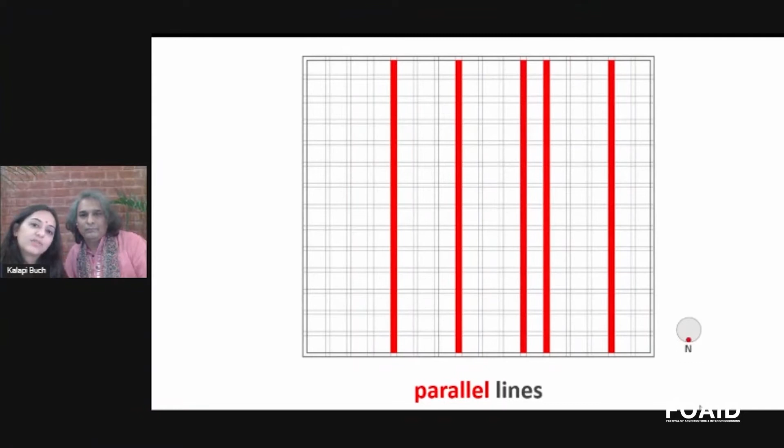We started establishing the relationship of built versus open, and first established the 5 structural lines of the residence, then started opening it up, and finally found this kind of arrangement, where the space flows from outside to inside and inside to outside.

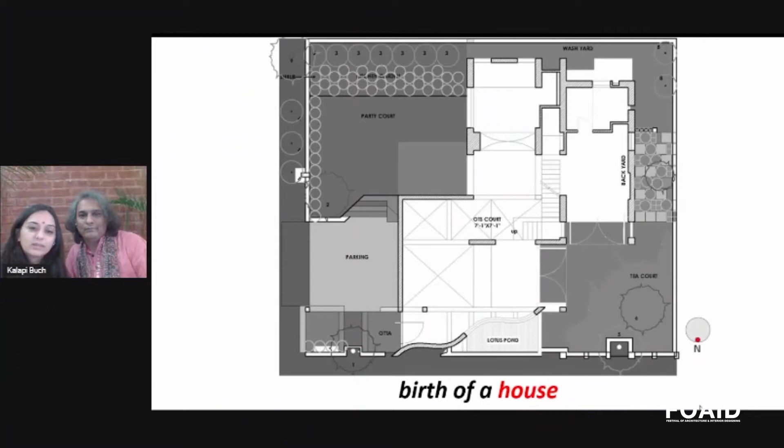Here we have 3 courts: the party court, the central court, and the tea court. They are three different courts. One is inside the house, within the house, and the other two connect to other roads and the surroundings.

Here we didn't have much scope to connect with surroundings, so we have used a lot of skylights, and the other huge openings are opening towards the courtyards.

So friends, it's my turn. Use of local material and craftsmanship is another way we look at our projects, and I just want to show you one approach where we have used paper tubes which are locally available, and have really gone on to use it into the project.

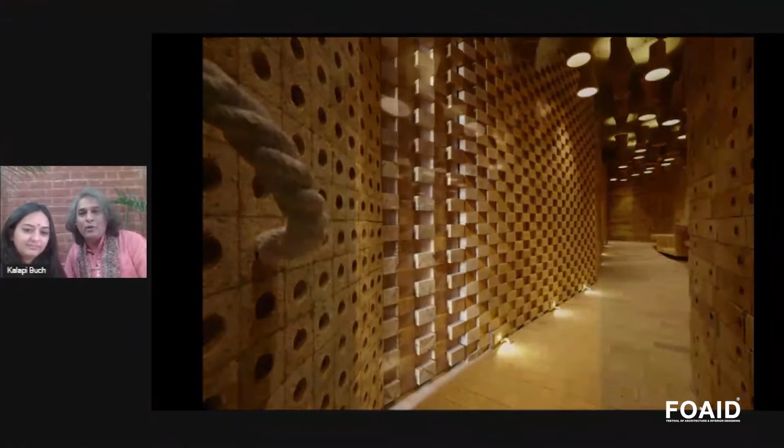The next project is the reusable tile house. I want to show this and say that one aspect is how we conserve nature, and another is that if we have a product which has already been manufactured, as designers we can do something about how to use it in a manner that it can be reused. Here is an example which we have applied in this project, and I would love to show this one.

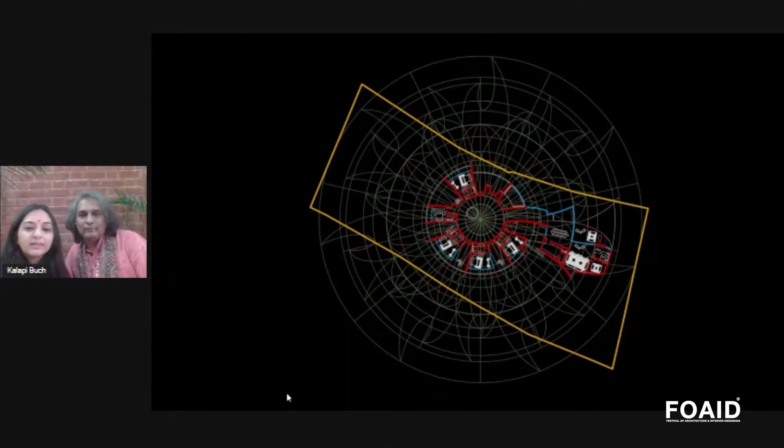The site had 12 mango trees already there, and the left corner that is open has all those 12 mango trees. The other open part was meant to welcome nature, and we wanted users to participate and engage more with outdoor activities as well.

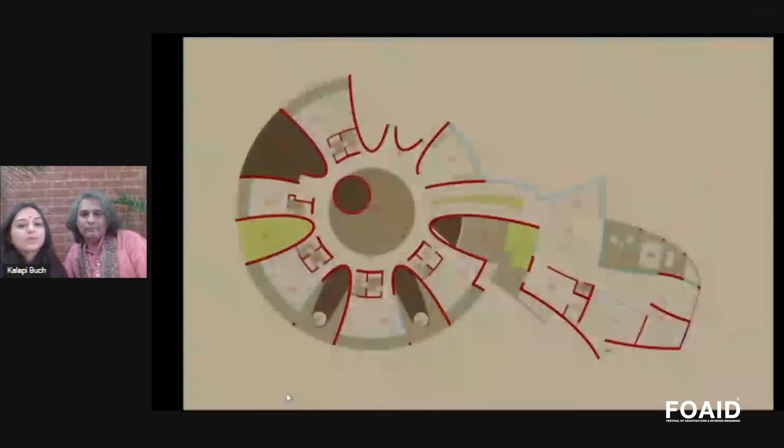As you can see, the Rag Mandala becomes an important feature in the design we are doing. Here is another example where the Rag Bhairavi Mandala has been used to design this particular residence, and such a beautiful layout has emerged with such an organic pattern.

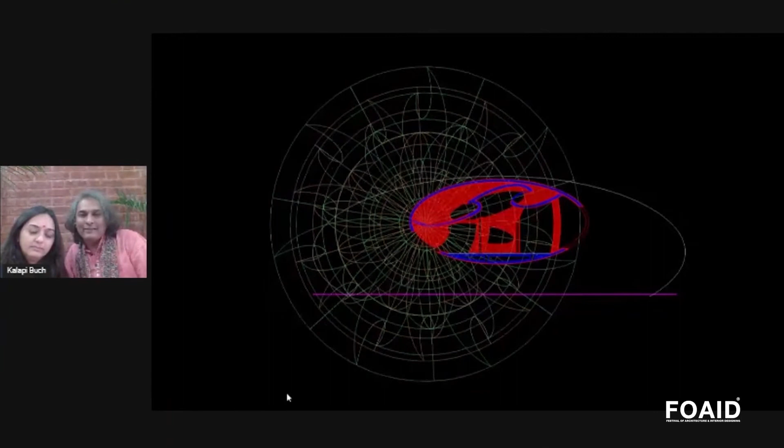In one of the other houses we are doing in Dakor, which we call House of Swing, this is the Rag Mandala of Hindol Rag, and we repeated it 8 times to develop the planning of this house, as you can see there. We also used the same Rag Mandala to derive the sections and elevations, using it as a grid to derive the elevations, sections, and the entire form of the house.

Also, in the raga, the brick bond pattern is derived from the distances used between the swaras in the raga. As you can see here, the entire pattern followed in the brickwork is 1, 1.5, 0.5, 1, 1, and the entire brick wall of the house has been done this way. Further, for the elliptical opening in this particular house, which you will see here, we have designed certain jalis.

These jalis have been climatically designed, taking their derivation from a particular bandish sung by the Dhrupad Gayaks, the Gundecha brothers, and taking the derivation from the swaras of that bandish, this jali has been carved out, where the blue is the glass and the red are the bricks.

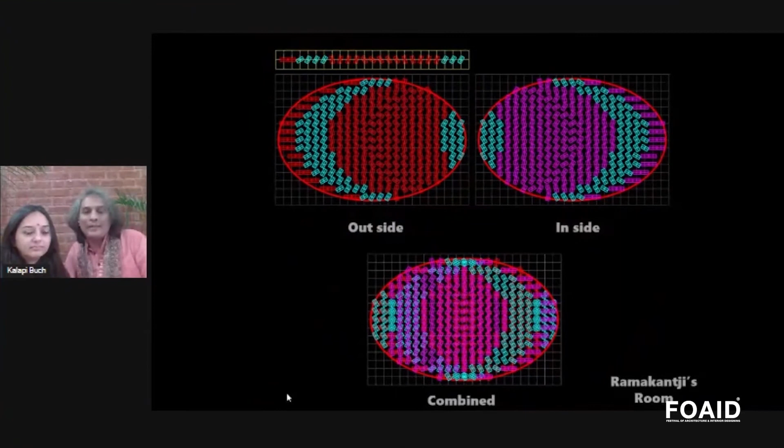Here, simply a single line, as you can see on the upper side of the screen, is put in the middle and then shifted from left hand side to right hand side to derive something very organic, unthought of, and beautiful. It has been used on the inside and the outside, bringing more complexity to the overall design.

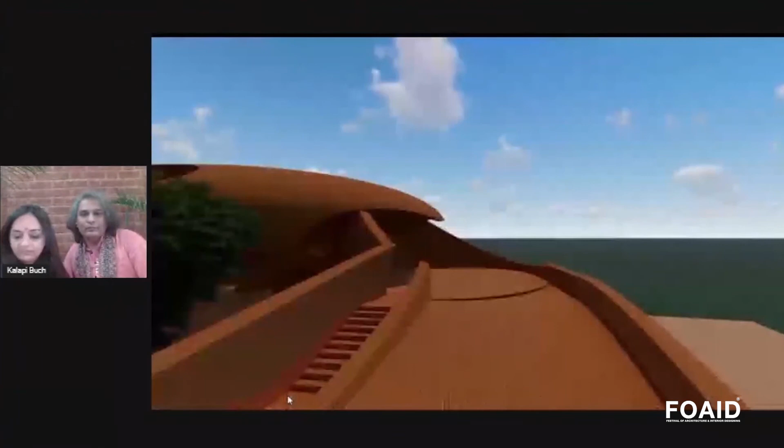This ramp connects from the land to the sky. And this is a central sky court.

Around this court, the 14 bedrooms have been placed. On the lower floor, 9 bedrooms are used by their sons and daughters and the ones who are going to visit them, that is, their guests.

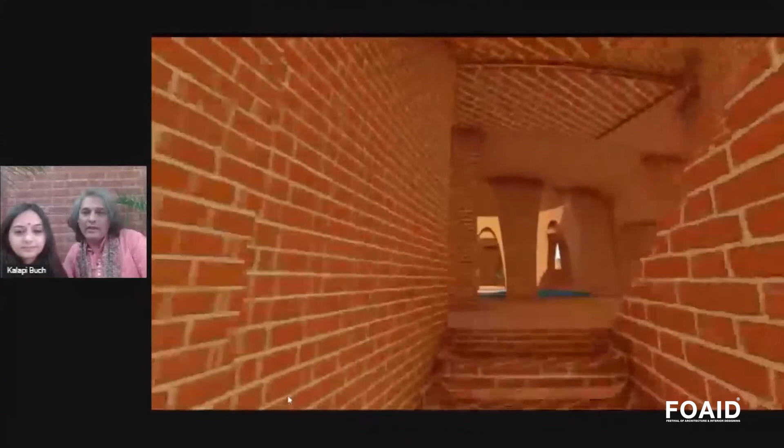This area has a double wall system, so it can really control climate. And this is the court above, surrounding which 5 bedrooms of 3 brothers, mother, father, and sister are located. So here enclosed, semi-enclosed, and open, that rhythm has been set.

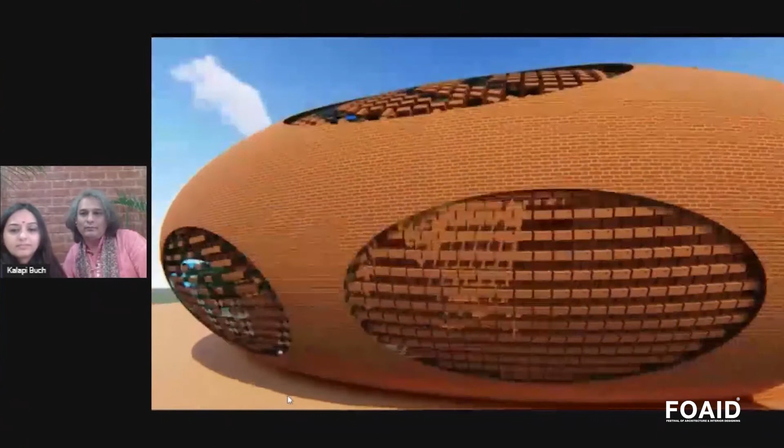The best part is that the project is on site. As you can see these visuals, we are underway. Around 60% and more work is over on this particular house, as you can see in these images.

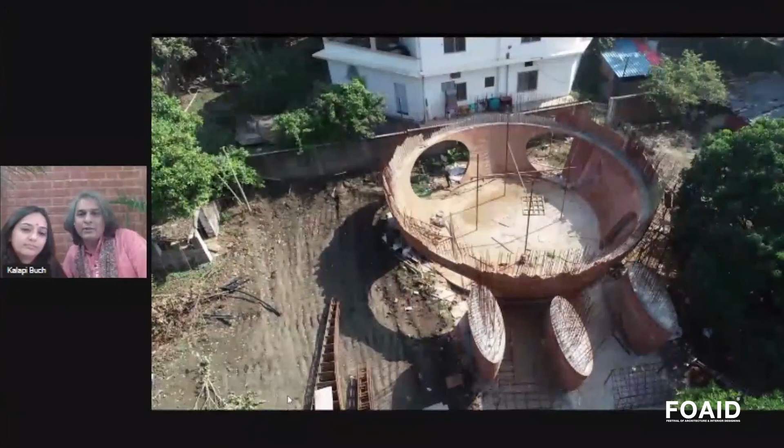We are extremely proud that we have some phenomenal clients and phenomenal work staff who are getting this entire project into shape and making it a reality.

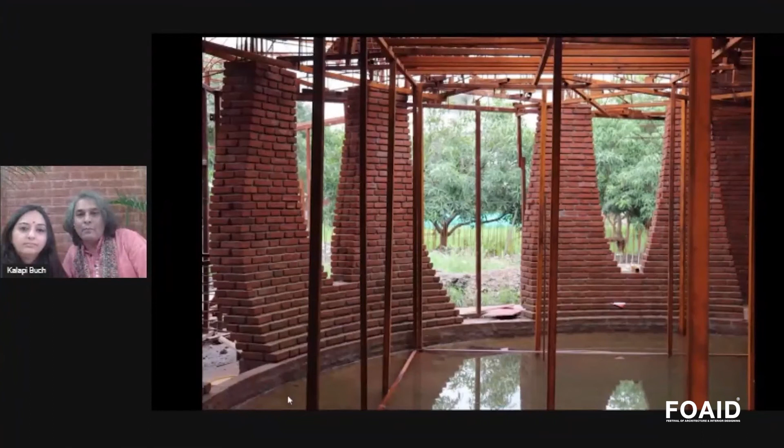There are so many aspects to talk about, but one important aspect at this juncture is the musical mandalas, the rag mandalas, and the usage of Indian classical music in our projects, in collaboration with Dr. Janki Mithaiwala, a PhD in Indian classical music, as well as a disciple of Padma Bhushan Dr. Prabha Atre from Kirana Gharana. We are extremely thankful to her for her insight and for really extending the present boundaries of architecture and taking it ahead.

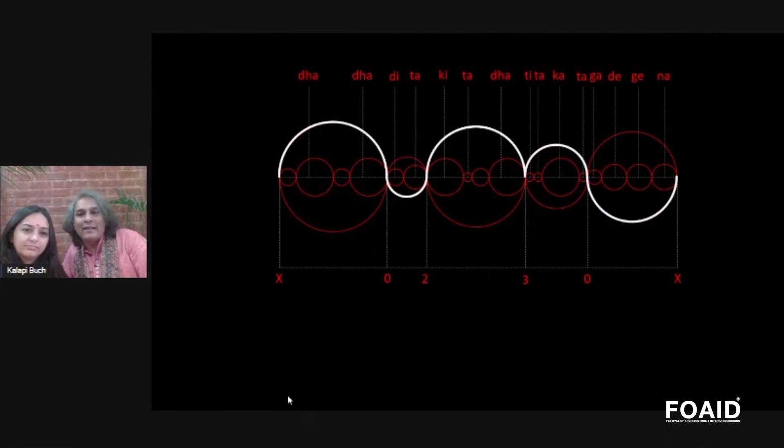As we talked about the swaras, now let's talk about tala as well. In one of the bedrooms we designed in the Gundecha brothers' house, one of the brothers, Akhilesh ji, is himself a pakhavaj player, and his son Siddhant is a tabla player. So the entire form of their room's ceiling has been derived from this particular pattern. As you can see in the white line, that becomes the line for this 3D formation, and the entire thing has been derived from that.

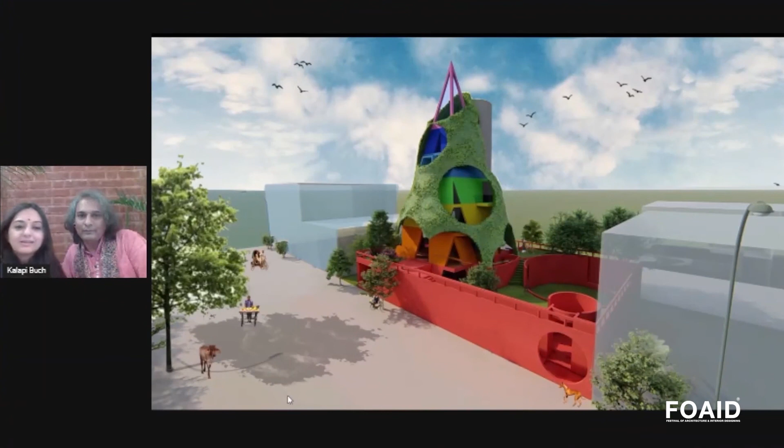Besides that, the tal has also been used in one of the upcoming houses we are doing in Ankleshwar. Tal represents the cyclic movement of nature, and here it helps us abstract the idea of cyclic movement, rebirth, day and night, and this kind of movement of nature. So we have used tal, teen tal, to help us represent that.

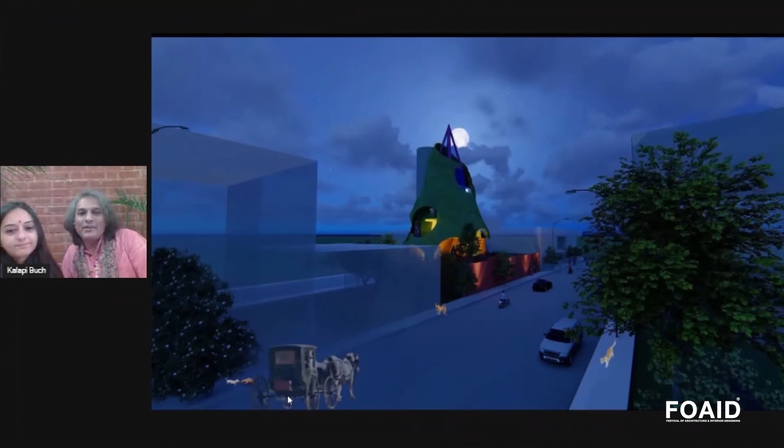These are beautiful imageries of this upcoming house. We are very happy that the ground floor slab has been reached, and it's taking shape so beautifully in our own vicinity town of Ankleshwar.

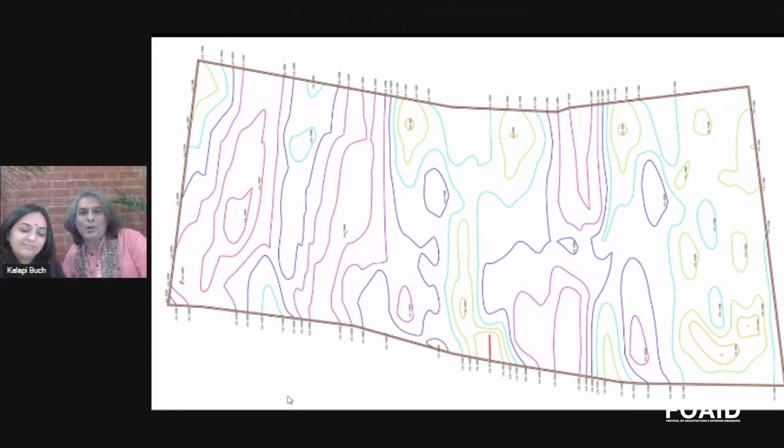Furthermore, the use of tal and swara has been done in the same site of the Gundecha brothers, where that bandish has shaped the entire landscape, and there are contours which, in times to come, we will surely share. So, in finality, we want to say that we are nature. We just need to realize this, that we are nature.